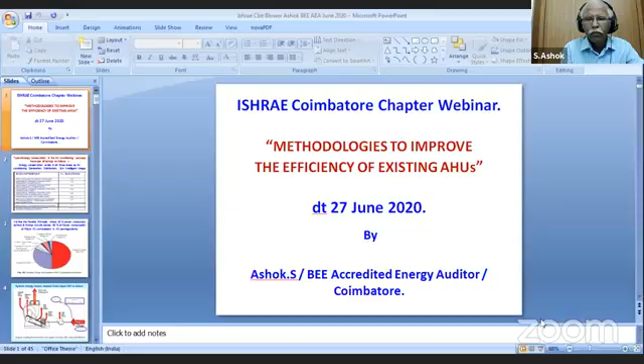Thank you, sir. Thank you. Good evening to one and all. Thanks to Mr. Sandil Raj, President of ISHRAE Coimbatore, for giving this opportunity. Is it okay? Yes, sir. Yeah, yes sir, it's okay. Good evening to one and all. Thanks for giving this opportunity.

The basic idea of going for these methodologies is to improve the existing AHU efficiency. Let us go in depth into where we have scope, and what all things are possible at zero cost and low cost, and what is to be done to improve the overall total owning cost of the existing AHU in the air conditioning system.

A typical energy conservation in the air conditioning package: we are all aware, but just to list down, for the air-cooled screw chiller, the percentage savings show where we are able to save more. On the screw chiller, again, it's a centrifugal type only, about 10% is possible. On the variable speed drives for the pumps, primary and secondary, around 10% and 20% only. But on the variable speed drive for the air handling units, both on the fresh air as well as on the main air handling units, around 30% scope is there.

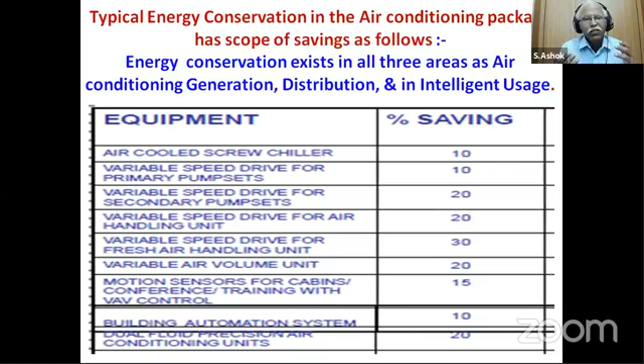This 30% scope means the efficiency of generation is less. So the scope for implementing and increasing energy efficiency is possible in the generation aspects. Let us go in depth into that.

To start with, let us take the air conditioning loop by loop, the total air conditioning system. It's like the Pareto principle, where almost 20% of the power consumers of the air conditioning system—either the fans and pumps—contribute to or decide the 80% power consumption of the major AC air conditioning compressors. So the high and low factor of the AHUs decides the AC compressor's consumption.

Almost 50% goes towards the auxiliary, split between supply and return, and on exhaust as well. The fan circuit, or air circuit, is consuming more in the auxiliary circuits compared to the pump circuits.

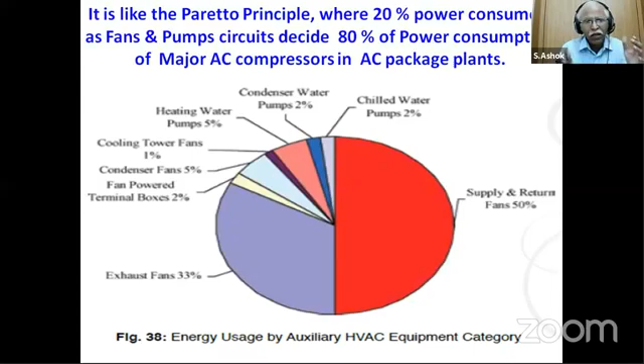What can be done on this air circuit is, typically all the air handling units use centrifugal backward curved or inclined fans, either aerofoil type, plug type, or plenum type, whichever fan is used. We have done energy audits in many green buildings as well.

We found that in an existing air handling unit blower, for a given 100 units of input electrical power, only 30% was available at the delivery of the AHU blower - that is the volume and the Pascal.

Here, what can be done on the VSD side? It's all small drops making an ocean. What can be done on the VFD? What can be done on the motor? What can be done on the belt and pulley? What can be done on the impeller? And what can be done on the system installation and orientation?

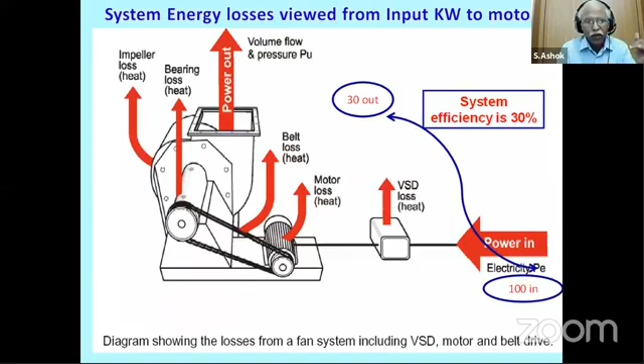All these aspects play a big role in the generation efficiency and running efficiency of the AHU. The purpose of the main AHU, the critical part of the air conditioning and air washer unit, is the final delivery of air diffused through the supply diffusers in the AC premises. It should be the right amount of air volume, temperature, and static pressure.

If this static pressure is maintained correctly, the supply air is diffused at the optimum velocity, then the return air will definitely be smooth and healthy, giving sustained heat transfer and comfort to users in the premises for long hours of AC working.

So I am concentrating on the final delivery of the AHU to the air conditioning premises. Air conditioning measures, air washer OEMs, and user industries can target this area. These are sustainable, optimized parameters required in AHU systems that will deliver appreciable savings in AHU electricity consumption - we are looking at a collective reduction of energy consumption in air handling units.

It is small drops that make a big ocean. What are all these savings possible? We are not saving, we are only conserving. We are not trying to compromise the output - we are giving the same output, for which we can reduce how much input is possible.

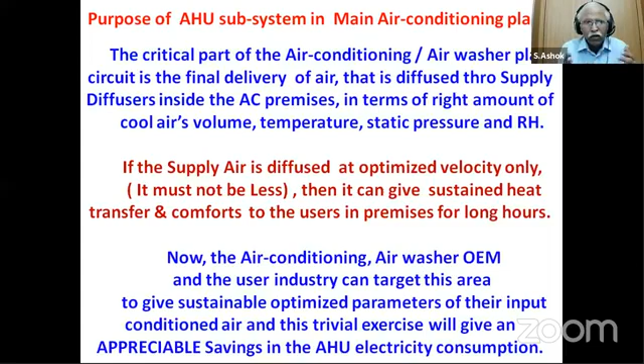I'm taking a case study - the breakup of a 10 HP centrifugal backward blower. It can be an AHU or any system or utility in the industry. Let us look at the first row and second row: the first row shows the old backward inclined impeller I have been using in the industry, and the second row shows the new backward impeller.

Straight away we can see around 20% savings - visible on the VFD, the motor, the belt and pulley, fan efficiency, and system efficiency. The old fan efficiency is around 50 to 60%, the new one is around 70 to 80%. This is where we are concentrating: one is on the impeller side.

The next is on what is given to the impeller, what is given to the fan shaft from the motor end, and how overall system efficiency can be improved upon.

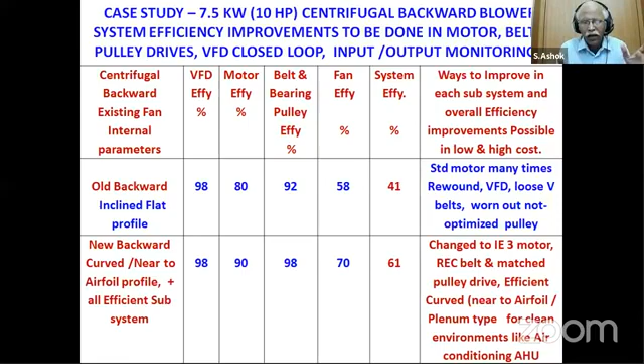If you see a typical 5 HP AHU blower motor, almost 60% of the motor input is converted to air power - 40% is exhausted as heat. For example, 3.73 kilowatt input, with motor efficiency of 90%, drive efficiency around 94%, and fan efficiency around 70%, automatically delivers an output efficiency of only 60% as air power.

Let us concentrate in depth on the areas where we can try to improve efficiency, both on the generation side and on the distribution side.

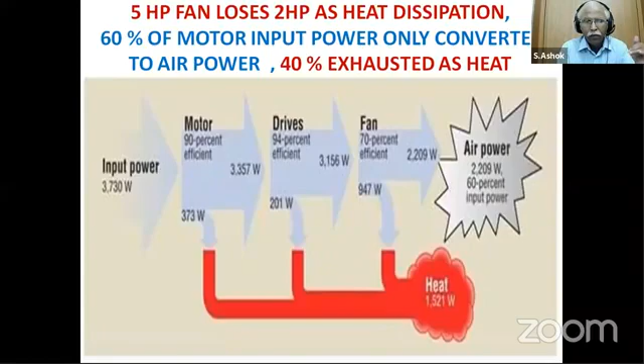So the energy conservation measures, especially choosing the right sized fan or impeller. Second is reducing the system resistance. This is what all the air conditioning service providers have given an excellent, optimized, lowest possible system resistance. System resistance is nothing but the static pressure we maintain in the delivery of the AHU systems up to the supply diffuser.

Next is whether the fan is operating at the best efficiency point, where the system efficiency curve and the static pressure curve match. That is the best efficiency point for the given fan AHU, and are we close to it? If not, this can be improvised by retrofitting a VFD and selecting or facilitating the best possible curve.

Maintaining the fans regularly and controlling the airflow efficiently instead of using a damper, go for a VFD.

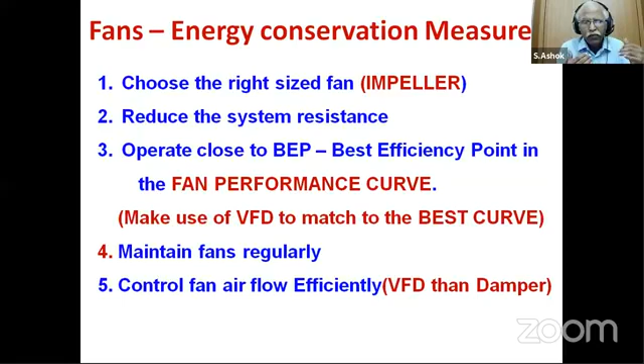The Bureau of Energy Efficiency gives a lot of inputs, especially on fans and pumps, and especially on all air conditioning circuits. We go in depth into the system, looking at what existing fans we are using and comparing that with what the theory suggests.

Centrifugal fans can be forward or backward curved, but most industries or air conditioning plants use backward curved only. And it can be curved or inclined, or modified radial, or radial, or a forward curve pressure blower.

Ultimately, an efficiency of almost 83% is possible, but our present running efficiency is only around 60%. This is where we want to pitch in and improve upon what is possible in the existing AHU.

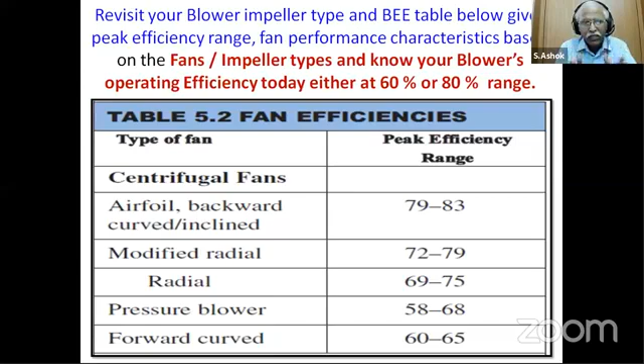Normally, any type of industry, including air conditioning, talks about motor efficiency in terms of two decimals, like 90.23% or 93.20%. But the blower efficiency, none of us talk about, whether in the user industry or the OEMs.

It's not a question of finding fault; I am trying to address a gray area where the blower efficiency band is not addressed by the user industry, the service provider, or the OEMs. So let us go in depth into where the efficiency band can be predicted as per the fan performance curve, and how much this can be achieved.

Thanks to EESL, BEE, under the Power Ministry, they have started national replacement programs for LED bulbs, motors, pumps, etc. We are suggesting that blowers also have a potential of almost 20 to 30% energy savings through replacement. Let us take that approach to improve the total efficiency of the blower and AHU systems by a minimum of 30%.

You can see the flat efficiency curve of the motor versus the inverse umbrella type efficiency curve of the airfoil or backward impeller, which is a narrow band, whereas the motor's is a broad band. If the efficiency of the motor and the impeller are superimposed together, this is where we take the impeller, and this is the best efficiency possible for the given impeller.

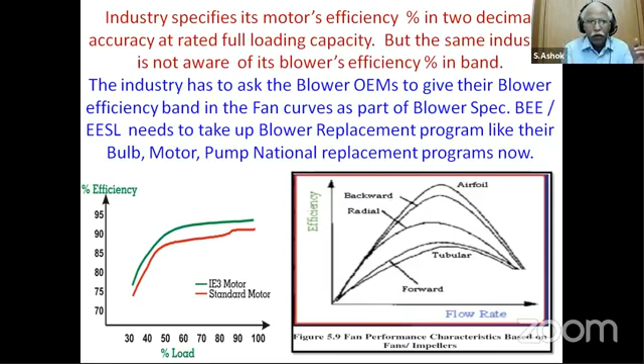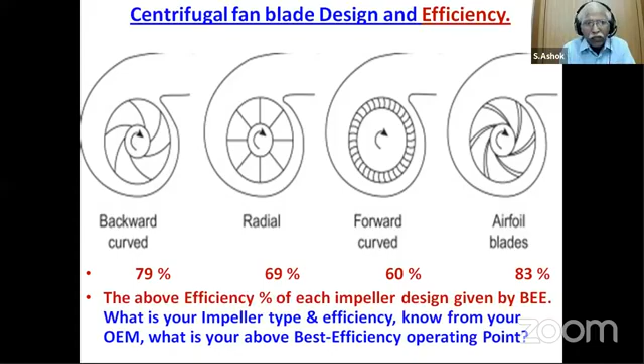Whereas backward curved inclined is almost 79%, and airfoil blades give the maximum efficiency of 83%. So what impeller type and efficiency has the OEM supplied for the existing AC installation, and what is the best efficiency or operating point that should be given when commissioning or running the system?

Now, thanks to EC fans coming up, electronically commutated fans, they are trying to use PM motors. This is a 50 HP motor curve, thanks to ABB's technical inputs.

Our green curve shows the standard motor, the orange one shows the IE3 motor, and the red one shows the PM motor, the permanent magnet motor. This permanent magnet motor, why we are going for a PM motor or an IE3 motor, is because the efficiency curve is flatter and the part load efficiency is much better in the IE3 and PM motors compared to the old, many times rewound, standard IE1 motors.

The IE2 motor has become mandated under the ministry gazette. Any AC OEMs are supposed to use minimum IE2 motor only as per the gazette from Jan 2018. Now, when you are making the IE2 motor VFD compatible, you need to go for an IE3 motor so that it becomes VFD compatible, which is very useful for air conditioning applications.

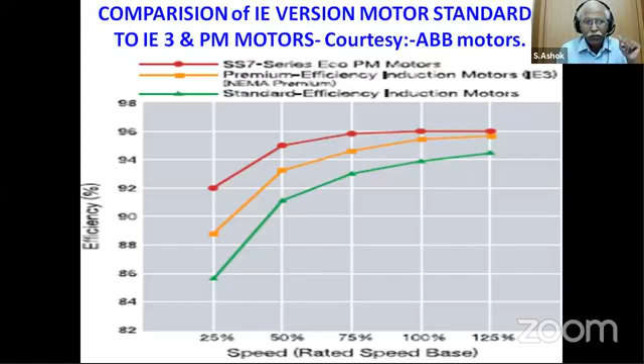It is a typical air conditioning AHU blower we have taken during the energy audit. I just want to share some of the screenshots. You can find the AHU's electrical power readings show less power factor. The electrical distribution for a given blower is also more important because the blower is at the tail end.

Once it is at the tail end of an existing installation, existing industry or air conditioning premises, there is a lot of single phasing, single phase loads, or unbalance in loads possible. The blower or AHU is at the tail end of the electrical distribution. So the power factor is around 0.6 or 0.7 only when the blower is operated at 50% loading. At 50% loading, if you want to improve, load compensation definitely improves the voltage to the blower.

Then definitely the kVA reduction is there at the incoming side if it is an HT consumer. And if the blower has been retrofitted with a VFD, we find many air conditioning units, especially on compressors, blowers and pumps, where VFDs are ejecting a lot of harmonics and THD at the incoming side. If this has to be curbed, we need to go for a line reactance choke at the input of the VFD, and this has become a mandatory provision to be done in all installations.

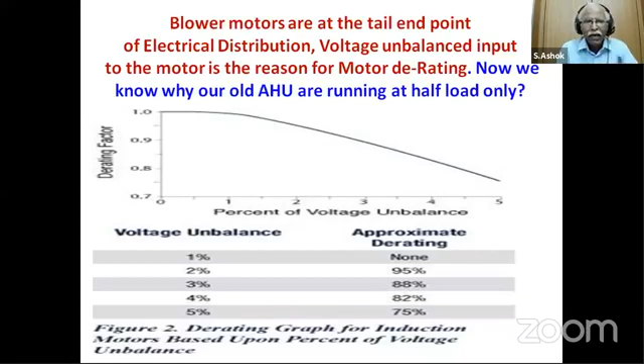If your blowers are running at half the load, the air circulation inside the premises gets affected. So you need to ensure the voltage input at each of the three phases of the given blower - any motor is a three-phase balanced motor only, but if it gets an unbalanced input, the blower motor gets derated by 25% if there is a 5% unbalance. So let us ensure that the unbalance does not happen at the input of the blowers.

Next, this is definitely a wanted changeover from the thermal overload relay to the electronic overload relay. It is called a motor protection relay.

It's fine, but for all the AHUs and pumps, if this electronic motor protection relay can be fitted instead of the thermal OLR, definitely we can know whether the pump is running at normal load, overload, or underload. A blower running at underload is a cause of concern, especially post-COVID times when the air circulation is less and the air thrown from the blower is less.

Definitely the IAQ of the air conditioning premises is put to task - it is going to vary very badly. So large scale continuous industries have gone for an alert and trip mechanism for any of their process equipments as well as for the processes.

Let us try to inculcate that practice in all our air conditioning installations, any of the ducted package units, or any of the AHUs or pumps you are using. Instead of a thermal overload relay, go for an electronic motor protection relay, which gives an alarm for underload and can trip the pump or AHU on overload.

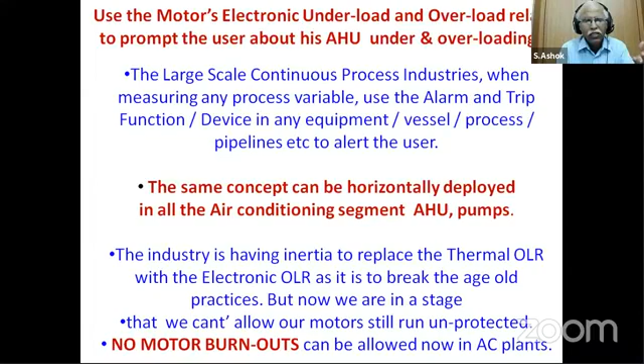The common parameters measured in fans and blowers include the input electricity consumption. Bureau of Energy Efficiency says any motor above 3 HP, if running for 2 shifts a day, should definitely be fitted with a meter, at almost 2,000 rupees cost. You can fit this for any of the AHUs - it has to be fitted.

You need a run-hour meter and a kWh meter to know how many hours the blower has run and how many kWh the blower has consumed per hour - units per hour.

Then the suction head and delivery head in millimeters of water column, or in Pascal as we say - 1 bar is 1 lakh Pascal, you can assume. So instead of talking in bar for pressures, let us talk in Pascals, especially for the blower on the suction and delivery side. The static Pascal is a critical parameter in the blowers.

Hereafter, we have to see to improve the efficiency of the blower and overall efficiency of the air conditioning unit also. The fluid temperature - we are definitely monitoring this in the air conditioning side. It's a general input, but for air conditioning we are already monitoring the temperature and the flow if possible, if variations are felt and if it is needed.

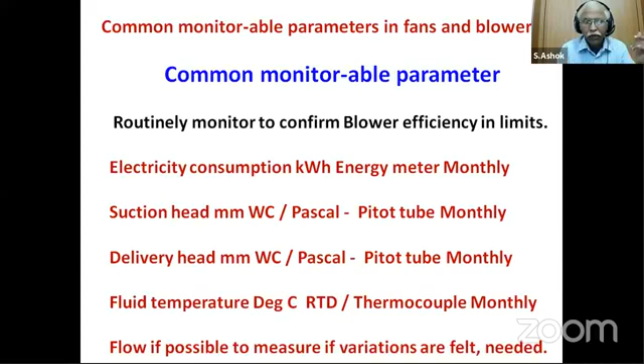Typically, Bureau of Energy Efficiency shares one key aspect - classify your loads as variable torque loads or constant torque loads. Many of your centrifugal pumps, compressors, and mainly the blowers come in the variable torque load category, where the RPM of a given blower is a very critical value, which indicates the flow, the static pressure, and the kilowatt consumption for a given blower.

We call it a cube law. It's an excellent candidate - the VFD is now being recommended to the industry to achieve energy conservation at the least possible given input kilowatt and achieve the same output. But this will become a mandatory phenomenon for all the blowers, or for all variable frequency, variable torque loads, I am telling.

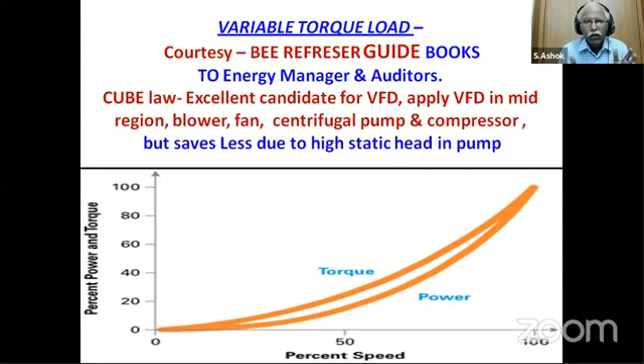The VFD will be a mandatory retrofit for all these types of blowers to achieve the best efficiency possible in the given blower.

Normally, the industry thinks once they fit a VFD to a given blower, we can achieve around 20 to 30% savings. But it's not just about the VFD alone - the VFD has to follow the best efficiency curve of the given blower. The fan performance curve is a critical parameter that must be available from the AHU OEM to the air conditioning OEMs and service providers to the users. We need to know where we are operating on the fan performance curve for the given static pressure and flow.

Now, this power savings is very much possible in a given blower, but it is not possible in pumps, because pumps need a minimum static head. Either the primary pumps or the secondary pumps, they need a minimum static head. After that only it can be optimized to achieve savings. So the percentage of energy savings achievable in a blower is much more compared to the pumping system.

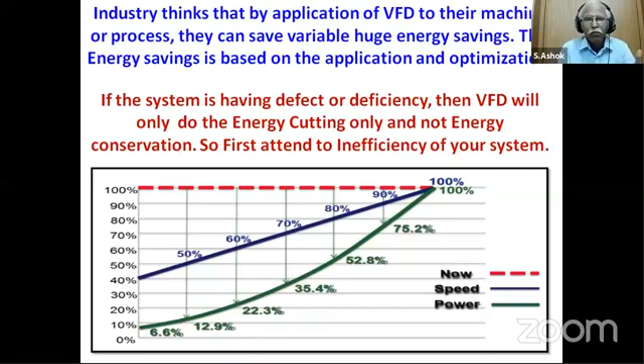But definitely the centrifugal pumps also need a VFD to match - ultimately we are trying to have a streamlined flow rate, say 3 meters per second or something. What the OEM has told us - what is the system resistance, what flow rate is to be maintained, what velocity in meters per second of the given air has to be maintained - let us maintain it.

By the fan's affinity laws, the RPM automatically decides the flow rate for a given AHU, and the same RPM of the AHU will decide the static pressure - the square of the RPM gives the static pressure of the given blower, and the cube of the RPM gives the increase or decrease in power input for a given blower. When I reduce the RPM by 10% for a given blower, automatically the flow reduces by 10%, whereas the static pressure reduces by 19%.

This is where we have to concentrate on whether the RPM reduction has reduced the static pressure, or whether the filter is choked that has reduced the static pressure. All these aspects tell upon the indoor air quality, or the supply air volume required at the premises, which is not there now. The main reason is either the blower running at a lesser RPM or the filter getting choked.

When a blower's RPM goes down by 10%, automatically power savings of almost 27-30% is possible. So the main idea is not to concentrate only on power savings - let us have the fixed output, and see what is the reduction in input kilowatt or power. That is what we are looking at. That is called conservation.

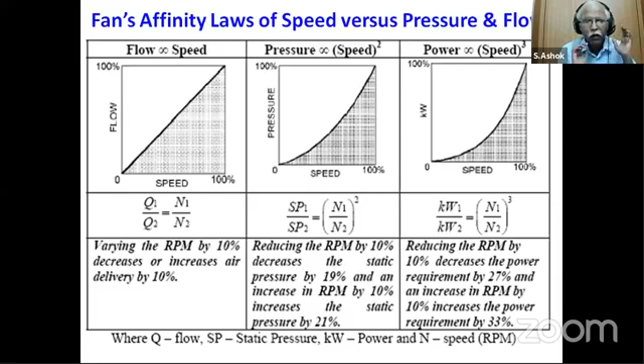Now the plenum fans or plug fans - these are best suited for HVAC applications. Many high profile OEMs, AC OEMs, as well as air conditioning majors use them. This is taken from Carrier Corporation's material. The plug fan is very much suited to HVAC applications and is definitely an excellent candidate to replace existing blowers.

It has a larger spinning wheel and a higher speed. Automatically the pressure and flow are comparable to that of a housed fan, and it is definitely superior to a housed fan.

This is a CII - Confederation of Indian Industry - case study of how it is done. Here also we can say a directly coupled fan has lesser flexibility than a belt-driven fan. I'll come to that also.

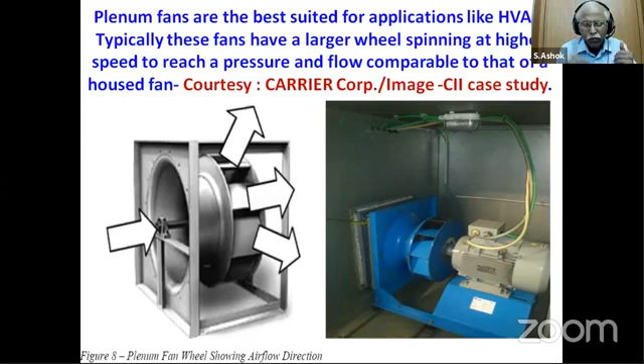Thanks to Carrier Corporation, this is a case study from Carrier where it is a 25,000 CFM blower. The motor is 30 HP, and the brake horsepower on the blower shaft that is demanded by the blower - if it is a forward curve it's different, but we are talking about airfoil and a centrifugal belt-driven plenum fan. An airfoil fan needs almost 32 HP, whereas a belt-driven plenum fan needs only the least HP. The blower shaft kilowatt demanded, if the impeller is a plenum type airfoil plenum type, is definitely the lowest. So this is significant.

Ultimately, what we are interested in is the external static pressure, or the application pressure drop that happens from supply to return - this is a critical and significant factor deciding the fan sizing or fan selection. Having gone for the fan selection, whatever drop is recommended should be achievable - that is the right size of fan we are selecting here.

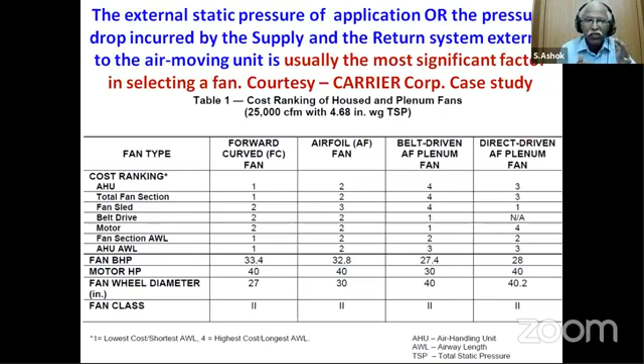The static pressure measurement can be done by a U-tube manometer, or digitally. This digital device is available from Testo, and it costs around 8,000 rupees. Any AC service provider is supposed to have a static pressure monitor at the delivery and suction of the blowers.

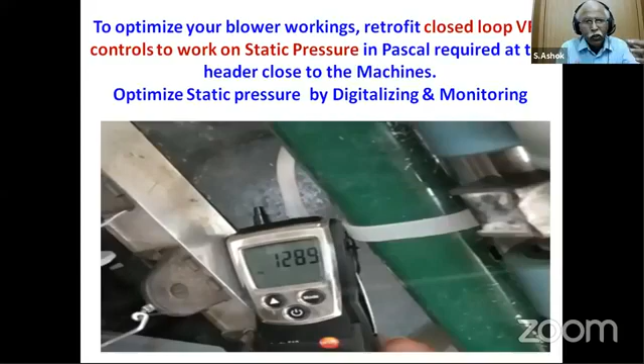Wherever possible, it should be measured at a streamlined area. When the plenum has a streamlined flow of air, that can be measured and checked further. Digitalizing the monitoring, based on closed loop control of the existing VFD of the AHU, delivers more energy conservation. Let us look at the blower performance of a given blower.

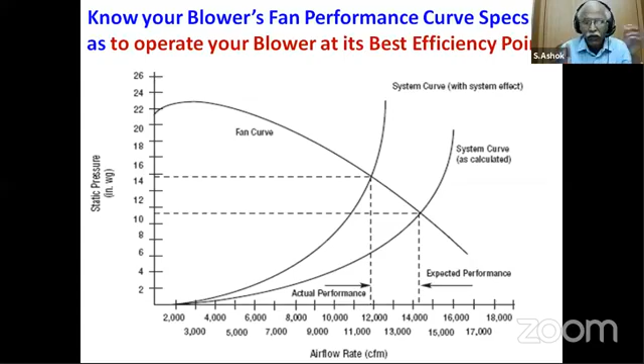This is why I was suggesting that all the filters used downstream of the blowers, especially on the supply side AHUs, show a higher drop. A dirty filter takes a higher static pressure, and a clean filter takes a lower static pressure. A filter is defined by the minimum allowable delta P across it, the rated delta P, the maximum delta P it can take, and the minimum it should have when installed.

These are the four parameters for the given filter after the heat exchanger - that is, this much filtration is supposed to happen, along with the static pressure drop. This is going to decide the level of CO2 rising indoors in the air conditioning premises, and IAQ is a critical parameter now in post-COVID times. The AHU has done excellent loading to maintain air circulation inside the premises, and air balancing can be achieved only if the AHU is loaded optimally and correctly.

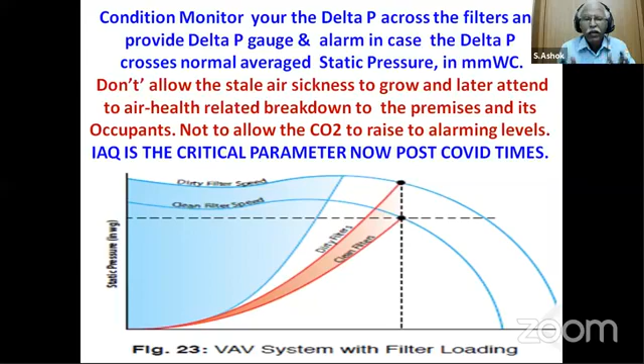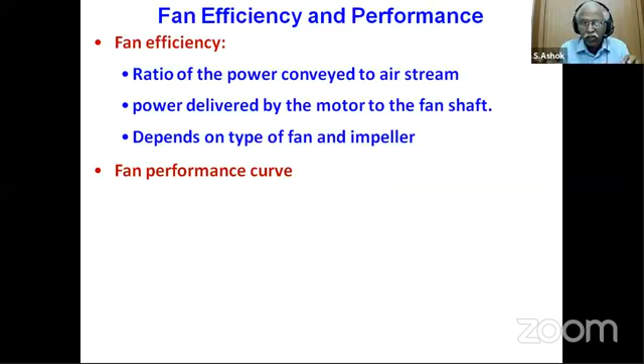If it is loaded less and delivering less CFM, IAQ is definitely going to be a big challenge for us. So the fan efficiency performance we see in the AHU is the ratio of the power conveyed to the airstream, or the power delivered by the motor to the fan shaft, the blower shaft - it depends again on the fan and the impeller.

The graph of different pressures is the fan performance curve. Whenever an AC provider, air conditioning plant, user, or industry buys a blower, it needs to come with a fan performance curve. If it doesn't have one, it's like buying a commodity. So if you've already bought a fan, try to retrieve its performance curve to study where you stand on that given blower for optimum loading, optimum static pressure, and optimum kilowatt.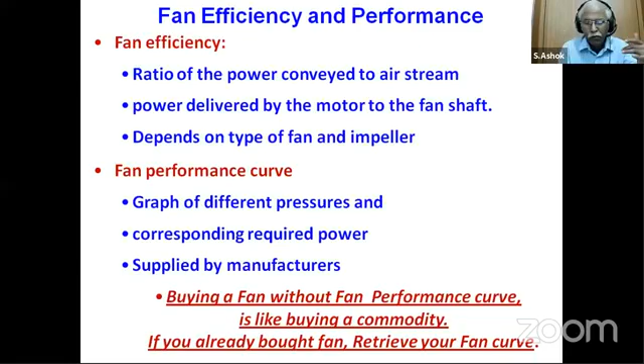High volume, low speed - this is the latest concept or trend where we've even gone for vertical ceiling type fans, high volume low speed, which gives a wind chilling effect inside the premises. Similarly for the blower, if it's able to run at 750 RPM or 960 RPM, it can deliver the best efficiency or best performance curve at the best efficiency point. So the blower efficiency is around 60%, with the contributing factors being static pressure, volume, and RPM of the blower.

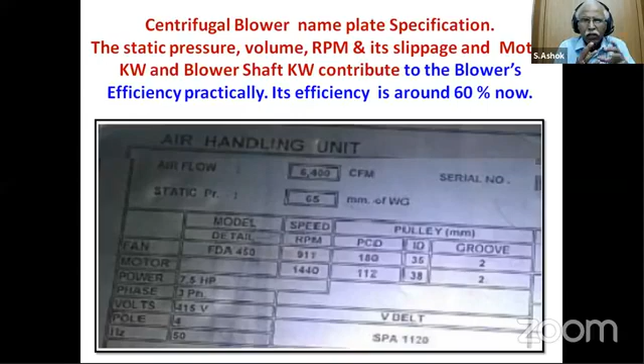How can this be controlled? The static pressure means the system resistance. System resistance is the total pressure, which is the sum of static and dynamic pressure. But we concentrate more on static pressure because it is a function of the ducts, the pickups, the elbows, and the pressure drops across the equipment.

Wherever the duct goes, we go by A1V1 equals A2V2 - area and velocity, this is velocity. But still, the system resistance varies with the square of the volume of air flowing through the system. Longer and narrower ducts with many short bends introduce more resistance in the blower delivery static pressure.

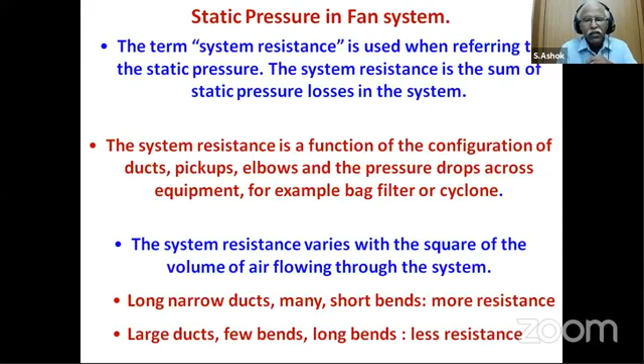Larger ducts with fewer bends and longer bends always give less resistance in the static pressure.

Let us revisit the blower nameplate where we visually check and find the blower impeller efficiency is around 60 to 70%, using the Bureau of Energy Efficiency's simple calculation for existing fan static efficiency: volume in meter cube per second multiplied by static pressure in mm of water column, divided by power input to the blower shaft, gives the fan efficiency. So whatever blower you come across, first calculate and find if the blower's efficiency matches the existing air conditioning system.

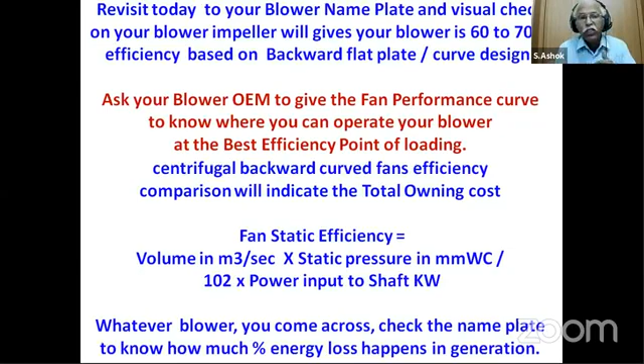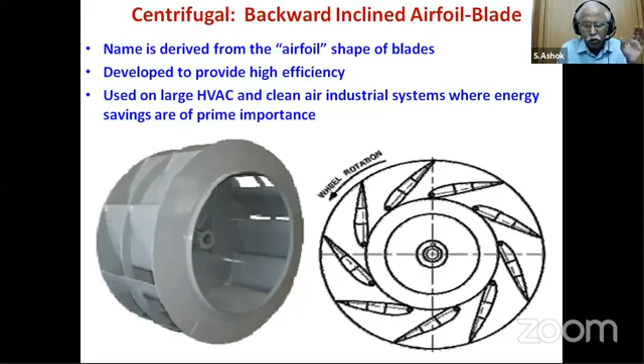For centrifugal blowers in air conditioning, we should use airfoil blades only, because airfoil gives the maximum efficiency impeller. If it is a dust-prone condition, then you have to go for an inclined impeller, but if it is airfoil type, it is best suited for air conditioning applications.

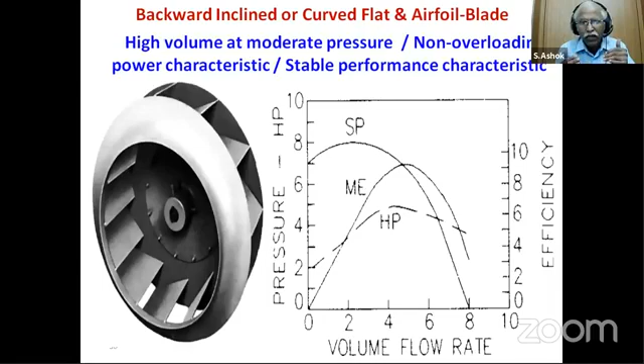Consider the three curves: static pressure, mechanical efficiency, and the HP power input. The point where the static pressure and mechanical efficiency curves intersect is the best efficiency point, delivering the most stable performance characteristic for the given blower, whether it's curve type or airfoil type. This is the area we need to check for each and every blower.

What blowers do you have in your air conditioning system? Is it a flat plate, backward curved still, but flat plate, not even inclined? This type delivers only 5 to 10% less efficiency.

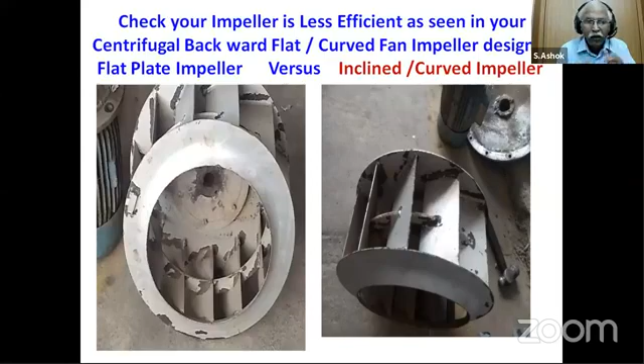Check your impeller design, whether it's an old, poor efficiency impeller or the latest efficient impeller, and whether it's curved or flat plate. If it's a flat plate curved impeller, the drop is around 5 to 7%; this can also be checked. If it is airfoil, or near to airfoil like an inclined impeller, this is where maximum delivery is possible. For air conditioning, we need only the airfoil type impeller.

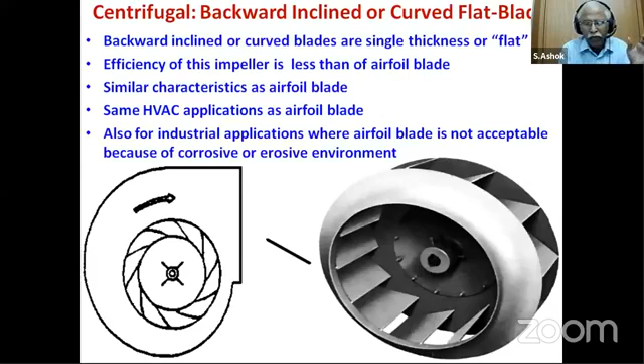Then comes the belts and pulleys, the transmissions. Please don't allow visible losses to happen by rightly sizing and gripping.

The Indian Dental Association says a toothbrush needs grip and needs to be replaced once in 3 months. Similarly, all your belts and pulleys are replaceable or consumable items to maintain grip on the motor and machine. The motor and machine have to be gripped by the belts, and the pulleys also should not be glossy.

The typical energy losses happening in V-belt systems, say around 3 HP, is almost 7 to 13% loss in the system. This can be controlled and definitely brought down to less than 2%. Let us go into that.

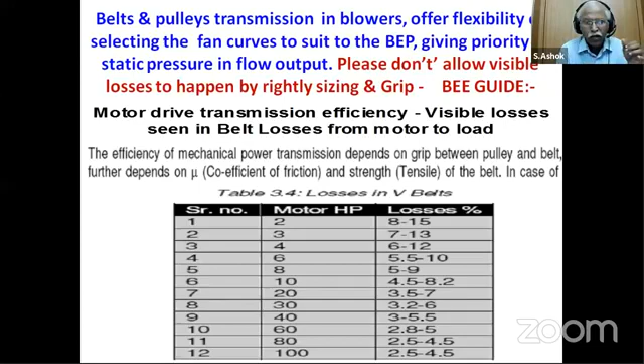On the left side you can see the existing blower. It's a small pulley with a loose belt, and it's a heavy belt. In 7 out of 10 cases it's a heavy, over-designed belt. The belts and pulleys themselves consume more power than they should. So switching to a better setup is an immediate, very low cost fix.

Within a maximum of 2 or 3 months, the payback is achieved by switching from this V-belt pulley to a cogged belt pulley. When changing to the cogged belt pulley, you can also resize your pulley to achieve better grip. The coefficient of friction does not reduce, and it is able to sustain for a minimum of 2 to 3 years. Any pulley is rated for only 40,000 hours, even running continuously.

A typical belt and blower fixed on an AHU: the belt and pulley can also make the AHU motor fail, or cause overload and make the motor fail if too much tension is given. You can see the belt is having almost 78 to 80 degrees temperature because of over-tensioning. It should be slack, but not too slack; it should be touching and gripping the pulley.

If it is not gripping, it is going to be a loss for the system. The motor is running at 1500 rpm, a 4-pole motor, and if the belt is not gripping properly, it is causing the motor to give more slippage, which is a loss to the motor as a system. For any given motor, whether it's on the AHU, pumps, or compressors, driven to non-driven, the temperature difference should be less than 20 degrees.

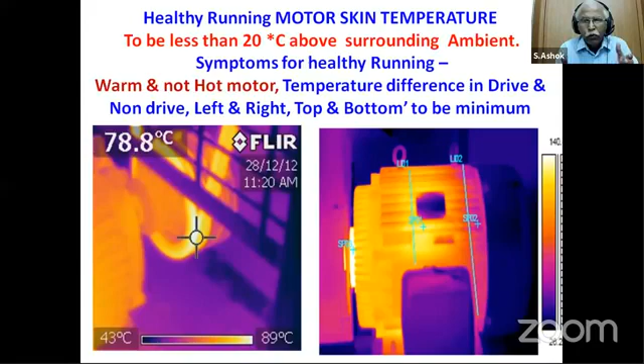A typical motor to blower with B-belts, this was taken on an IT building at Chennai, and we found almost 20% loss.

We are trying to achieve a part load efficiency of kilowatt per ton from 1.5 down to almost 0.5 to 0.7 kilowatt per ton. We are talking about overall efficiency. But when you have a dead band of almost 20% in your AHU efficiency, a slippage of 20%, this is going to make a dent in the overall efficiency of the air conditioning system.

Having generated such heavy torque in the motor, if the blower is getting only, say, instead of 1464 rpm stepped down to an expected 976 rpm at the blower end, we are getting only 771 rpm. This is happening in many blowers because it has not been looked into.

But thanks to IoT, let us also think about IoT devices that can be fitted on the motor and the blower to know the difference in slip or RPM happening in the revolutions per minute. Ultimately, this can also give you an input. When you are trying to improvise on existing air conditioning installations, these are all the areas to be addressed.

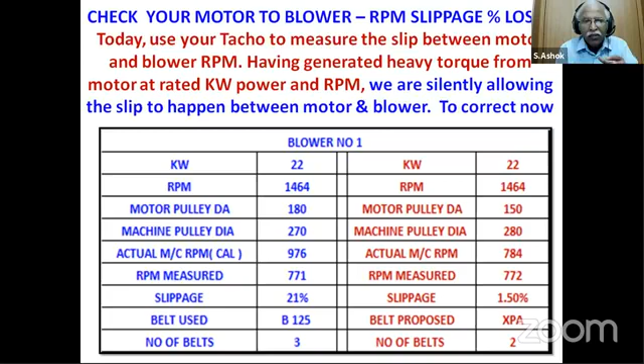A typical pulley resizing example: a 50 HP blower motor had an 8-inch motor pulley at 1470 rpm. It was reduced to 6 inches, a 2-inch reduction, because the client wanted less CFM at the premises since they had reduced the premises volume and wanted to reduce the airflow. So they just reduced the pulley by 2 inches, from 8 inches to 6 inches. Automatically, the power came down from 26 kilowatt to 11 kilowatt. It is a simple, very low cost installation.

But whatever pulleys are being used in all our AHU blowers, wherever we have done energy audits, we found that all the pulleys show a visible sign of being glossy, with dished-out surfaces, and they are slippery. Once a pulley becomes slippery, it is a point of loss, a visible loss, and we talk about this being less than 2%.

Whenever a blower or AHU is installed, the slippage between motor and machine should be less than 2%. If it is more than 5% or 10%, it is a loss, an energy loss, a visible loss, and it needs to be replaced and corrected immediately.

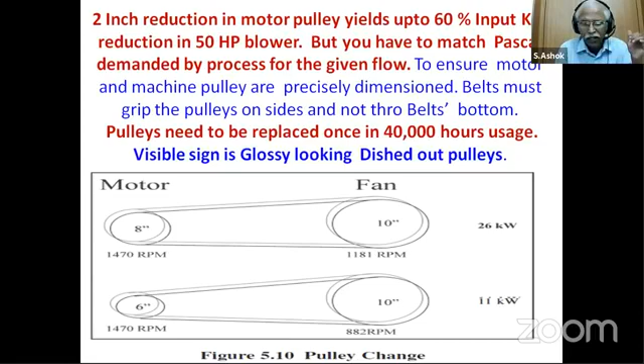This is why we are trying to go for VFD application for a given blower. The VFD retrofit definitely gives optimized loading compared to damper control. With damper control, energy consumption is at 60%, whereas with VFD, it is only 20% energy consumption. So VFD definitely reduces the input kilowatt for the same given output. But here the static pressure drops in case of VFD, so you need to monitor the static pressure and then go for a hertz reduction or input kilowatt reduction through VFD.

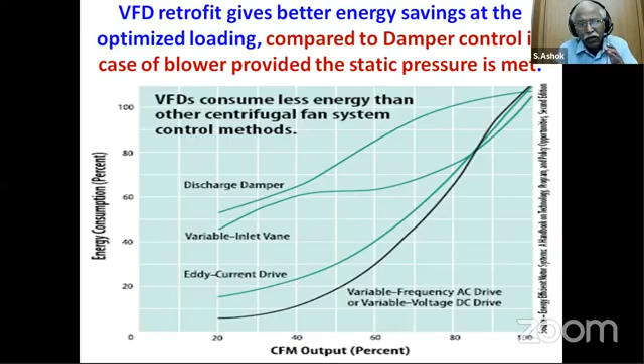It is a typical AHU blower system where we find a typical blower. The nameplate says 5.5 kilowatts, 7.5 HP motor with a 4-pole, 1500 RPM, and air quantity of 9600 CFM. A static pressure of 40 mm water column is delivered at the blower delivery.

Let us say the blower speed is brought down by pulley reduction to 1200 RPM. This study has been done in Lakshmi Electrical Control Systems, Coimbatore, at the new tool room center in December last year. It is running for the past 6 to 7 months. It is meant for a new tool room application where they cannot compromise on the airflow, CFM, or the temperature and RH they have to maintain. The VFD and belt pulley combination gave a savings of almost 30 to 40%.

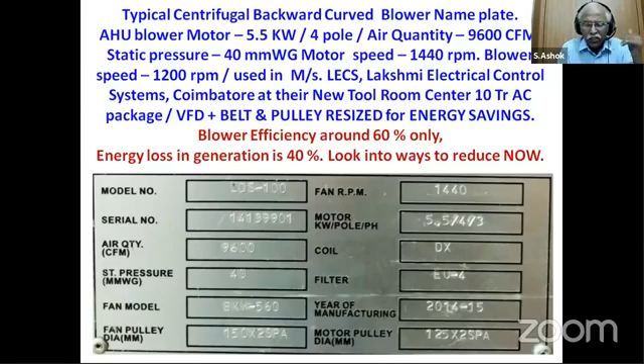Let us look into how it is achieved. The energy conservation is done here by oversizing the motor pulley and resizing the pulley. You can see the speed ratio: the given motor pulley and blower pulley is 125 and 150 on the existing AHU. On the new pulley, it is made 170 on the motor side and 140 on the blower pulley side, reversed from before. And the VFD is put to action.

So once the VFD is there and the pulley resizing is done on the given AHU - it's a 10-ton machine, a branded AHU, branded AC - they are able to achieve around 40%, almost 43%. How is it? Because they are able to raise the RPM of the blower instead of 1215 RPM.

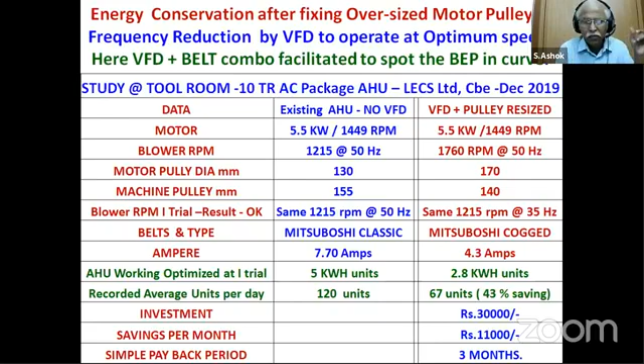For a given blower's VFD, many industries, utilities, or even air conditioning managers think VFD is used for manual operation - let us operate the VFD at 50 Hertz or 45 Hertz. It is not for manual use. Let us not use the VFD as a variable pulley option alone.

Let us try to use the VFD on a closed loop control system based on the static pressure as the input, as the sensor, and operate the output, the final control element of the VFD. The Hertz reduction or variation is possible based on the input static pressure fluctuations on the blower delivery.

A VFD is an excellent candidate if you are operating the system between 30 to 70%. Around 50% to 70% is more ideal to operate, not at 80 to 100%, where the VFD does not have any say. In fact it consumes more when operating the VFD above the blower's speed. So a VFD should be operated at 50% to 70% of the loading of the blower, which facilitates the best efficiency performance achievable in the given blower on the given AHU.

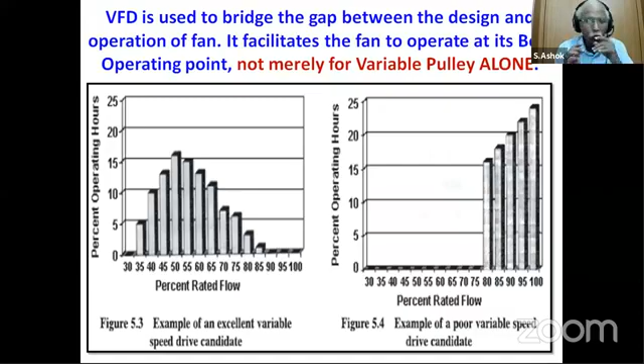So a typical pointer to all our ISHRAE members, thanks to the distinguished members of ISHRAE and IAEMP, BEE certified energy managers and auditors. Let us collectively work on our respective domains to reduce the user's annual energy consumption, and the air conditioning utility has to come down. This is a win-win situation for a user, for an AC service provider, for an air conditioning plant user, for maintenance, as well as for an energy conservation team.

Wherever HVAC installations are there, such as user industry or a building, they should conduct energy audits to reduce their energy bills. More than the reduction of energy bills, we are trying to sustain the safety of the air conditioning systems and subsystems. When we maintain the safety of existing subsystems, we automatically achieve energy savings, and through energy monitoring of the AC package, we are able to sustain the AC efficiency for longer years to come. After all, energy conservation is our collective responsibility for a given AC service provider, AC user, and an energy conservation team, either internal or from the energy audit team.

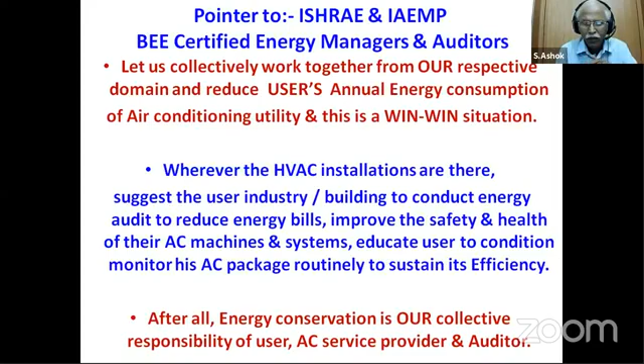So energy conservation measures, before and after the study. Any energy conservation measure done on the air conditioning systems, whether on the AHU, pumps, or compressors, either the kilowatt per hour has to come down, that is reduction in input for the given output, or you allow the output to run at the best efficiency point, but the run hours has to come down. This is the two areas we are trying to address now. So either the AC run hours should come down, or the kilowatt per hour should come down for the given air conditioning system, and AHU also.

All subsystems contribute to the macro efficiency of the given system, and the macro inefficiency of the given air conditioning system is due to the poor efficiency of the subsystems at AHU and pumps. This can be worked upon.

So let us first have the energy study and audit conducted internally by the user itself, then have the energy audit study done by certified and accredited energy auditors. Plenty are there throughout India, pan-India, more than 10,000 professionals. Let us have the energy audit study for the existing air conditioning system. It is a win-win situation for an air conditioning service provider, who is able to work as a team along with an energy auditor to reduce the user's electricity bills, energy bills.

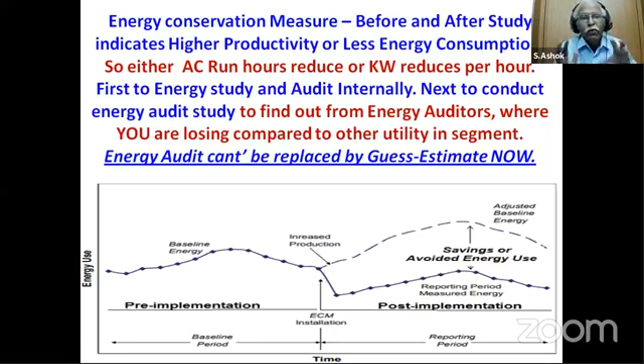This is happening, so let us try to reduce the KVA of a given AC consumer, and try to reduce the kWh or the energy bill of the given consumer. In any energy management, buying an energy efficient air conditioning system for a given client is only half done. How it is efficiently loaded and run is the other half. The day-to-day energy management, preventive, predictive energy management and maintenance management by users in buildings, thanks to IoT devices which are in-situ devices, and portable devices like power quality analyzers, help to see the power quality also.

Power quality is now overtaking power consumption as a concern because penalties are imposed by EB authorities, and it also reduces the KVA of a given consumer. Energy conservation is possible in an air conditioning system only when each subsystem is healthy. If there's a 20% reduction in slip on a given AHU, it creates a dead band or dead zone where the final control element tries to work upon the AHU, but there's a communication gap between the AHU input and the blower's delivery output. Ultimately, air circulation and air balancing from supply to return suffers.

So let us try to correct the individual AHU subsystem defects on the maintenance side, on the impeller side, on the motor to machine power transmission side, and on retrofitting the VFDs. These are the 4 parameters of energy conservation measures we suggest, especially in our energy audit proposals, and these are very much executable immediately for a given client. We always maintain an undercover of safety. We are not compromising on safety when doing energy conservation, because when safety fails, conservation fails. So we always give due respect to electrical safety.

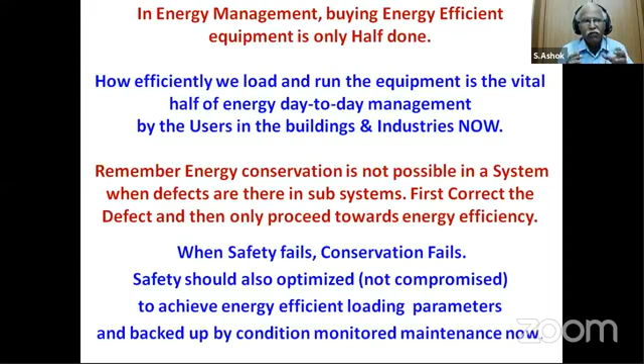Then, let's say you have an air conditioning system of a 10-ton pack, and the client says their air conditioning system needs a stable supply. But we cannot suggest going for a microprocessor based or unbalanced servo stabilizer as the main input for the air conditioning system, because it is a very costly affair. So we give an optimized safety, a robust, foolproof safety system at the input of the electrical side, while optimizing the air conditioning subsystems to achieve energy efficient loadings backed up by condition monitoring. This condition monitoring will tell whether your loading is correct, whether it is efficient, or whether we are optimizing it.